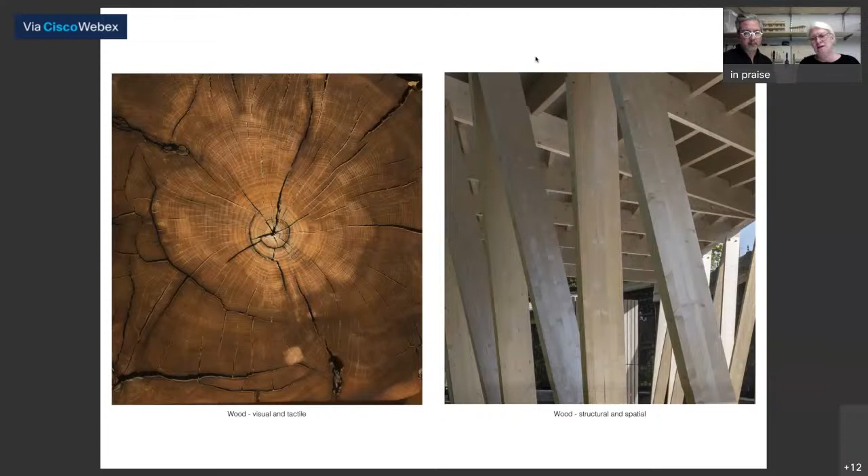As you mentioned, Daniel, we took the name of our office from the book In Praise of Shadows by Tanizaki, a book that we used and introduced to our students when we were teaching at KTH. It's written in the 30s in Japan as a reflection on the qualities of traditional Japanese culture, when modernity and modernism come to Japan as it opens up.

In relationship to architecture, there are some nice sequences, notions and descriptions of the light through a paper wall, or the sound of your steps when you walk on the gravel in the garden, the special relationship between inside and out, the door spaces, all the qualities in Japanese architecture. So we took the name as a kind of reminder for us in our practice, these tactile and sensual experiences, this kind of architecture as a very physical experience. It's one focus for us.

The publication we did with Daniel in 2018, in relationship to the exhibition in Venice, was a summary of the exhibition projects until then. For us, these smaller projects and exhibition projects are kind of research projects, experiences we use for larger projects, and we try to give ourselves a new area to study or a challenge when these kind of smaller projects appear. So the book is a story on that work and led up to the Pavilion in 2018, and that's a process that goes on.

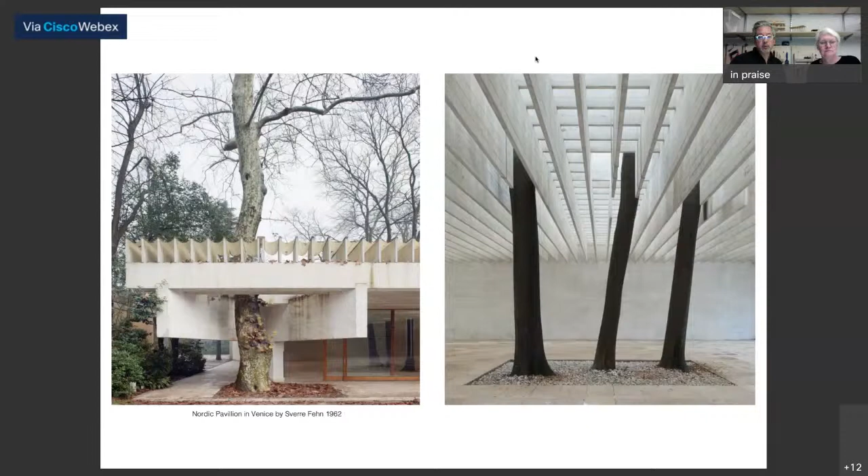This became a role model for how we've approached projects afterwards as well, because when starting with the white paper or empty space and having these tasks, we started with the drawing as a tool, investigating the geometry of the pavilion itself, seeing what we can learn from the structure, and how we could generate new shapes and expressions out of it.

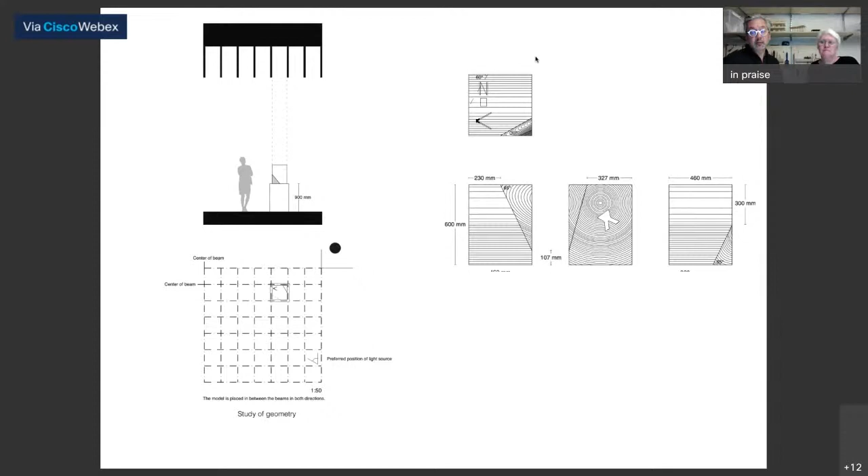So the footprint of our Elm installation is the same as the open space between these two layers of beam structure. We also worked with cutting angles in this object that relate to the sun angle in Venice, and treated the areas in different manners, also exploring the possibilities of this massive fresh wood collected from Royal Park in central Stockholm. The elm trees are taken down to stop the spreading of Dutch elm disease. So it was also a comment on wood, the trees in the Nordic Pavilion, and a geometric study.

It was then very strict in its original shape. We have it now in our office, and over the years it has, of course, deformed as these kind of really thick, massive wood pieces do.

Fredric, can you talk a bit louder?

Okay, I will. Just a few years later, we were asked if we were interested in working with the design of an Aesop store in Stockholm. Aesop is a global skincare brand based in Australia, and they were to open their first store in Scandinavia, in Stockholm. Their concept is to work with local architects to get a unique design for each store, and all these unique designs are their main strategy.

We thought we could learn something from the way we worked with the Venice installation, so we continued the collaboration with Lismary Hoffman, carpenter, designer, artist, who worked with how to handle these big, massive elm trees, and proposed to Aesop to form the three main events in the store: the sales situation, the demonstration sink, and a relax area, in fresh, massive elm tree.

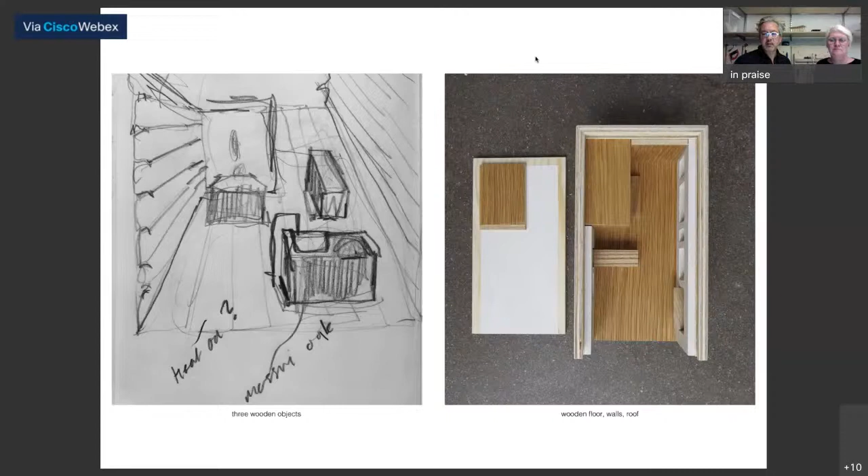We also thought, since the Aesop clients were interested in the In Praise of Shadows book and knew that book, we took the opportunity to relate a bit to the Japanese tradition of creating a sequence of spaces. So although a really small space, we worked deliberately with the outdoor view, what you experience outside. First, you enter one space with the sink, the demonstration sink and the counter, then there's a backspace clad in wood, also on walls and in the floor, and a small seating and relax area.

These are some pictures that you can see in the back, the all-wood environment. You sit on a piece of elm tree with a leather cushion, a soft back, and you see the central piece done from a piece of elm tree over 100 years old that we found south of Stockholm. It has deformed over time, but it gets more beautiful over the years. It was very fresh when it came, actually, even after drying for a couple of months and being worked outdoor, ants kept crawling out of the wood during the first months after installation.

A few years later, we were asked to design a second space in Stockholm. The first one was in a more posh inner city situation. The second, on Södermalm, a different part of the city with a different, more laid-back attitude. Their ambition was to make a more relaxed situation, to create a Swedish living room.

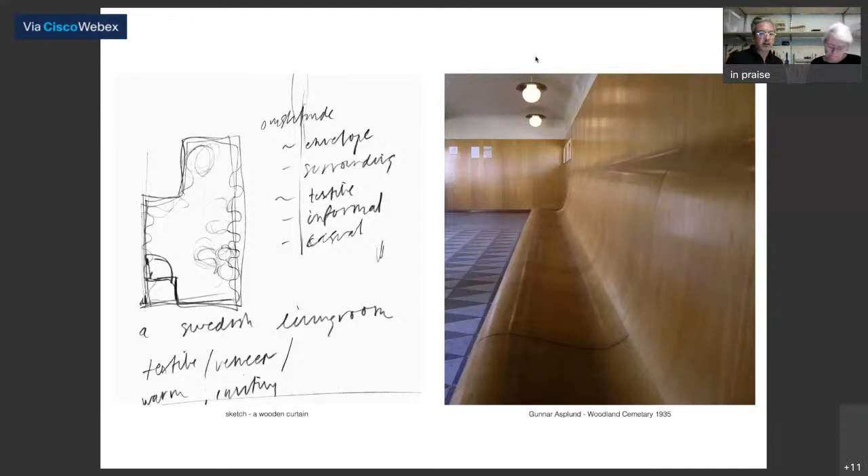We developed the concept of a draped space, working with the veneered wood as a curtain wrapping. It's really small, only a 25 square meter space, to create this second store.

Eventually we investigated different veneers and ended up with alder veneer. There's a nice warm tone to it without too much pattern, and it's also quite close to the teak wood on the facade of this building at the entrance floor.

Also in the entrance areas to the house, you see it on the left of the picture - it's a warm wood. We also took details from the entrance door, these rounded corners at the glass, to connect this interior to the building itself.

The floor is the existing concrete floor that we polished. The roof has a quite intense pink color, although you don't see it too much, not too much contact to it.

When investigating how this could be produced today, we ended up with the Italian carpentry, Solosomisura, outside Milan. They came here, measured the space, and we developed how to build this together with them.

They built it in sections, where they put the veneer on these sections correctly, so there was no molding involved - they could form the veneer on top of these modules.

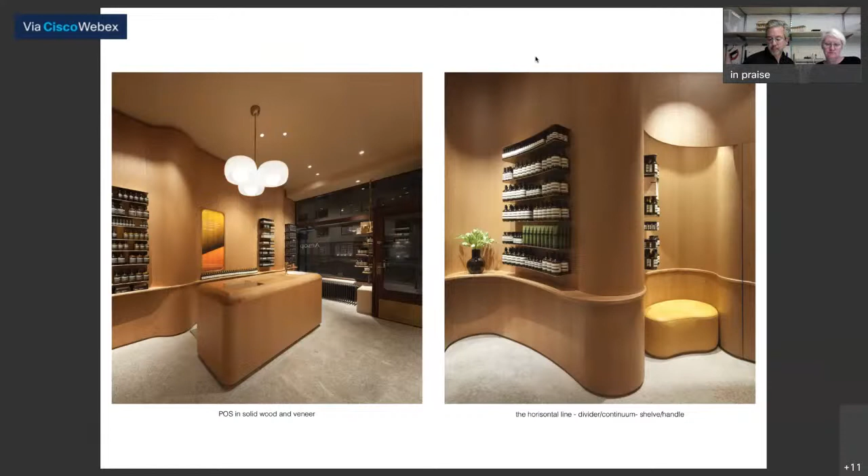As a continuing investigation in different wood, we got a question from Wallpaper if we could make a pavilion for the exhibition Handmade at Salone del Mobile in Milan. We got the assignment to work with Dinesen, a high quality wood floor maker, an Austrian cabinet maker, and do something together using wood planks, floor planks, but in a new way.

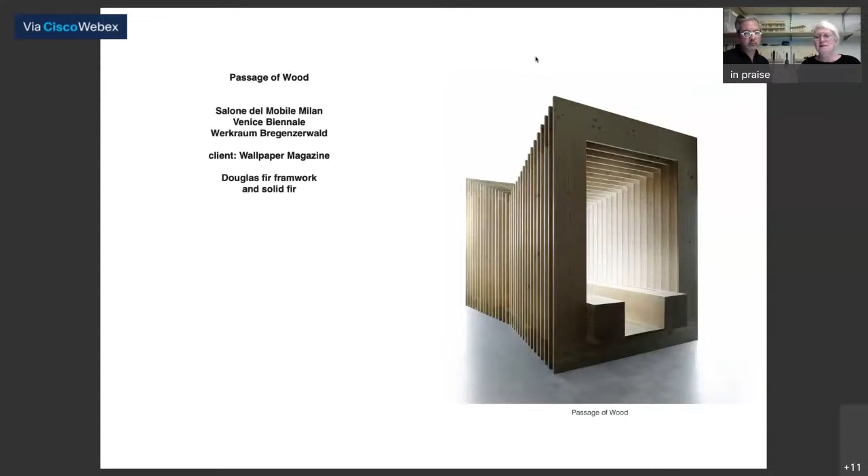So we used these different dimensions of the wood planks, both in plan and section, and put in two very heavy original tree trunks from this Dinesen Douglas fir from Austria, and made this pavilion.

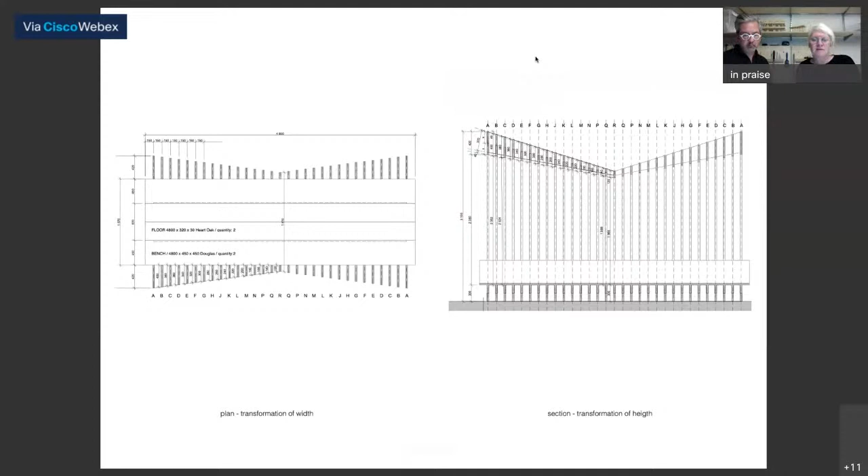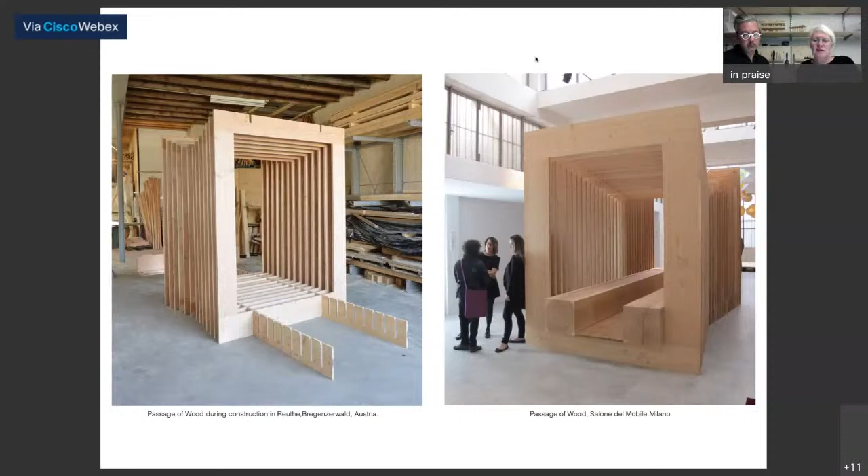This was made so we could easily take it apart and exhibit it at the Venice Biennale in a 14th century palace. It was so heavy that we had to take away these big tree benches that were in the original pavilion, and made this oak floor instead in Palazzo Bembo, just facing the Grand Canal.

After it had been exhibited there and also in Austria, they just wanted to send it to become firewood. So we thought we'd take the structure back home. It was possible to mount it as a flat package, like an IKEA package almost, and used it in the Swedish archipelago, making a kayak house for kayaks or teenagers sleeping over.

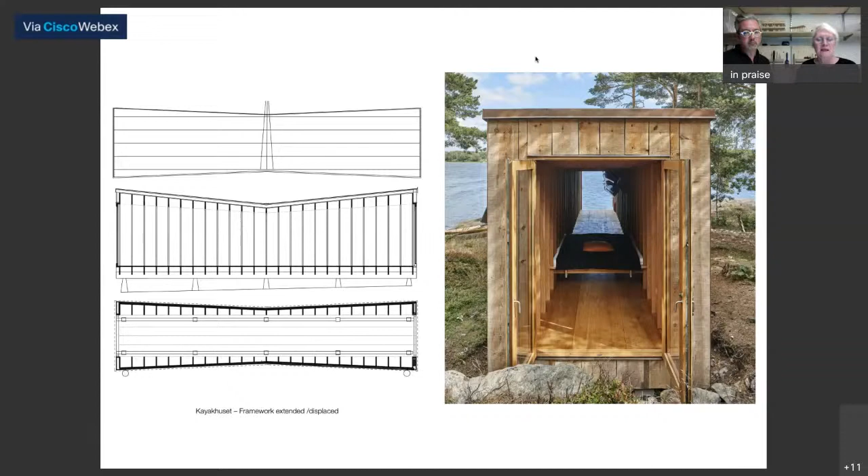The frames were mounted on 10 concrete pillars in the sort of blueberry ground. We tried to do it very carefully, not destroying the area around.

To contrast from the very fine interior frames, we took down 8 pine trees on the site. We had a carpenter cut this with a chainsaw and get some very nice facade planks, dried them for one summer, and then puzzled it together as a facade.

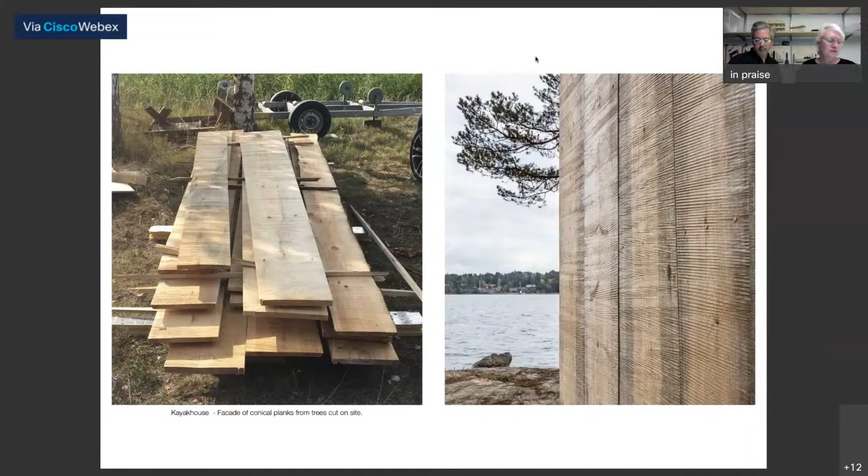So we thought we'd continue the tradition that Dinesen had, taking down one tree at a time in the woods of Schwarzwald - and now we did the same here in the Swedish archipelago. This house is seen from above, so we also took care to make a very nice copper roof.

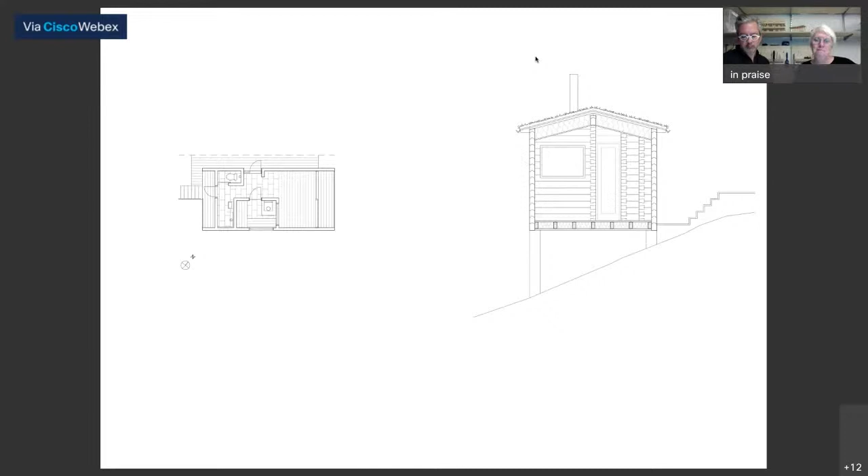And this is also, of course, a continuing transformation of the tradition of log houses. We wanted these joints to be seen both on the inside and the outside, and the plan was thought about how we could get these walls and joints in a logical way.

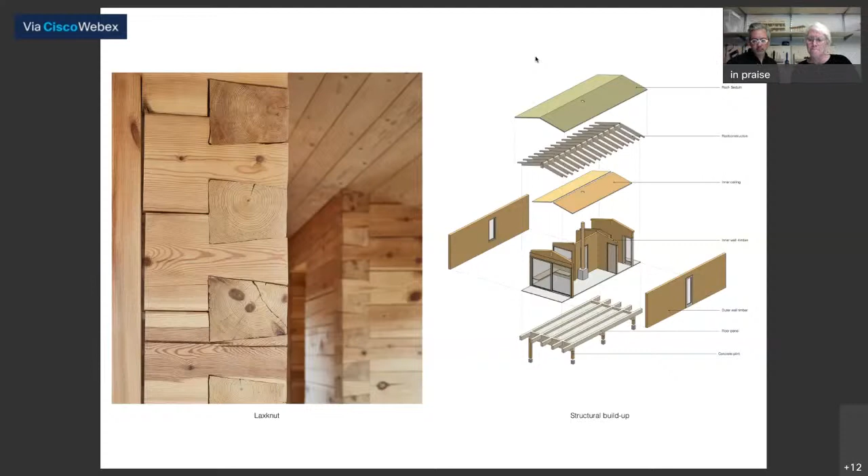So it's like a box inside with the sauna, and we worked on that you could see through the house - small house, but you can see through it. Here you see it stands on quite high concrete plinths that also go 2 meters down in the slope.

Then for the Venice Biennale in '18, we were invited - it was a collaboration by Sweden, Swedish Wood, the Association of the Swedish Wood Industry, Folkhem, a client of ours, a housing developer, and the Swedish Institute made a joint venture in the Serra dei Giardini, the garden outside the Biennale Giardini, as a collateral event to the '18. The theme for this exhibition, where other architects participated with installations,

was for architects to work together with companies within the building industry to develop architecture in relationship to their digital production techniques. So our task was to create an outdoor pavilion to function as a meeting space for seminars, as a stage for larger events, and also as an area to be used by the cafe when there were no events going on.

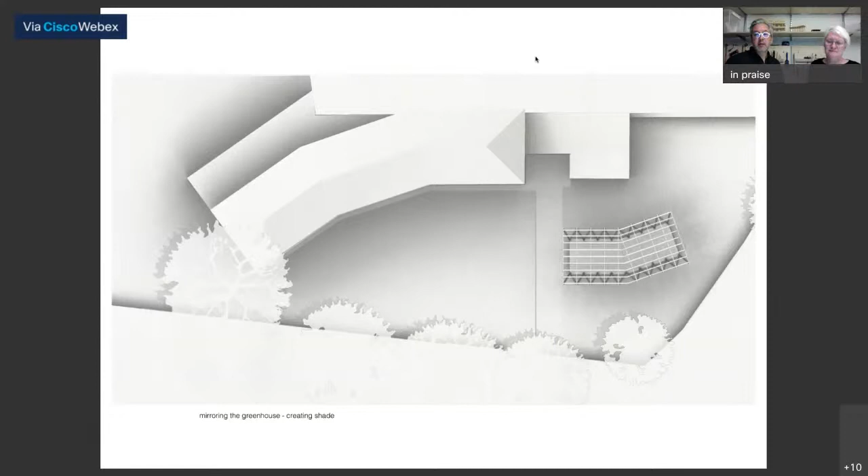Our task was to create shadow protection from sun and rain, so it was later called Loggia d'Ombra, which means shadow pavilion. We mirrored the geometry of the greenhouse to create a shaded place between the pavilion and the cafe area, so you have shadow on the ground as well as inside.

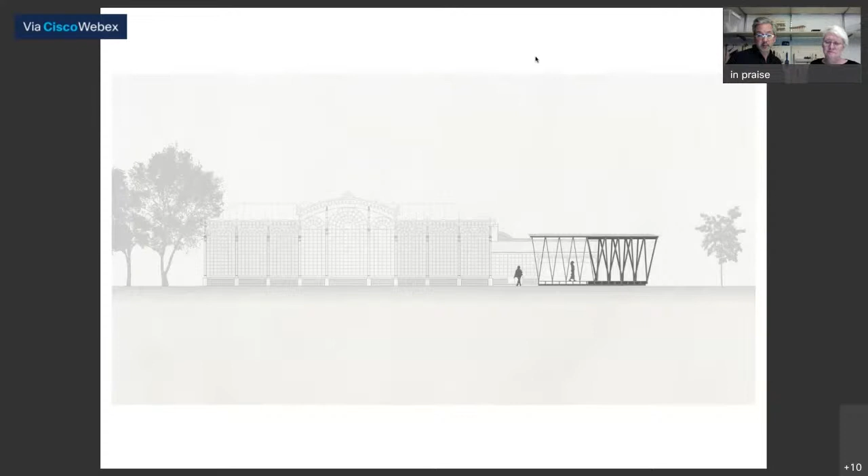We developed this diagonal structural system to have a clear structural expression just as the greenhouse has, and a height that is just under the greenhouse, to respect sight lines and perspectives on site. The authorities had some thinking about that. We worked, as we do, in digital models and physical models, studying the structure

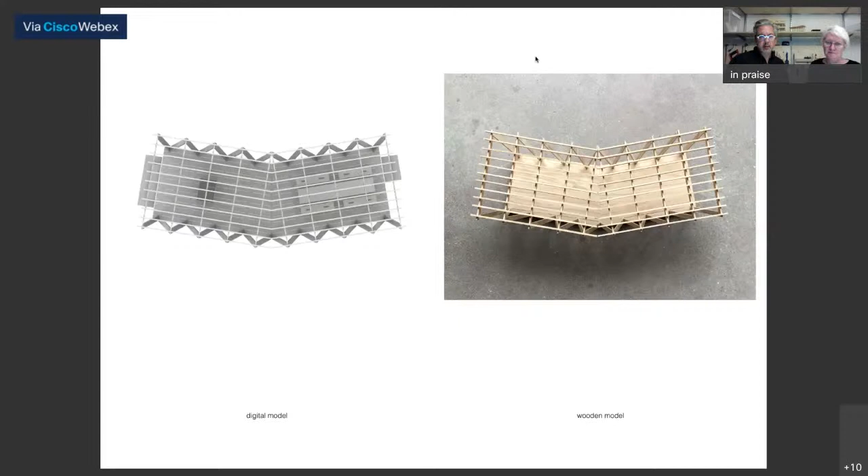for going into production. Then we had to find a way, with Martinsons, who's a glulam and CLT producer in Sweden, to build this as a structural system possible to assemble easily on site, but also to be possible to disassemble for use at different other places after the exhibition.

Most of the members are all glulam, 56 by 225, and most of them are also just cut, or with a diagonal cut. We focused more complex geometry on the diagonals, the vertical diagonals, and these joints that we wanted to be tight with a clear position for the fittings. They have visible screw heads, to show that it is a dismantlable structure.

Oops. I'll change the picture for some.

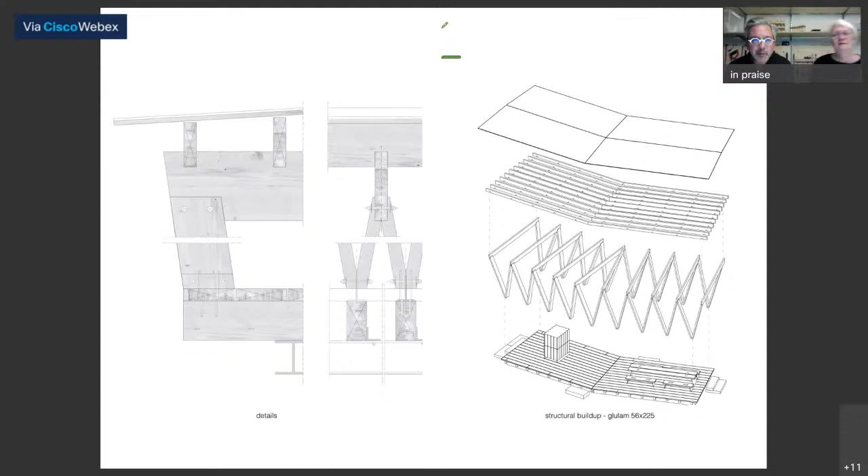Daniel, having some kind of commenting. I'll get rid of this. So, thank you.

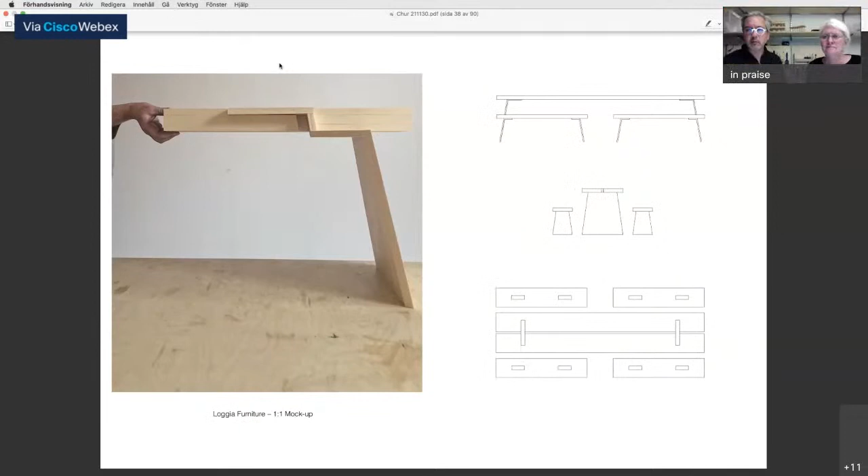Probably you can have the computer a bit closer. It's always very slow, and then the computer starts to fade the sound a bit off. Okay, it's at the limits. Let's put it that way. Okay, we will bring it closer. Maybe you get better sound.

That's probably better, yes. And to get a structural idea also better furniture: you see the horizontal seating part, which is made of wood, is carried by the leg structure and locked geometry. So when they are paired, you get a self-locking stable connection.

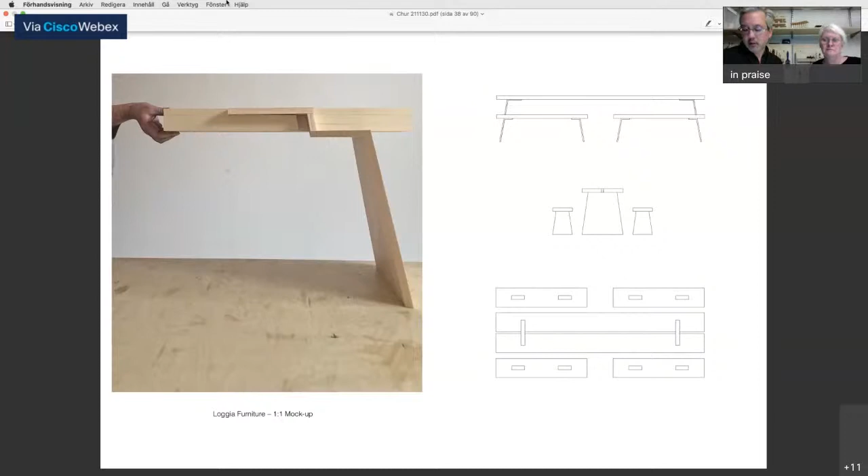And the legs were made in cast iron. Here we see the wooden plugs that we built, and then they were sandblasted to get a more visible imprint of the wooden structure in the cast iron. So these are the prototypes it's made.

And also the cast iron was for us interesting to investigate also in relationship to the greenhouse next to the pavilion.

We also developed this cabinet that was a space to put in LED screens that could be used for seminars and for presentations. So this is the short end that worked as a stage for the event on the grass area.

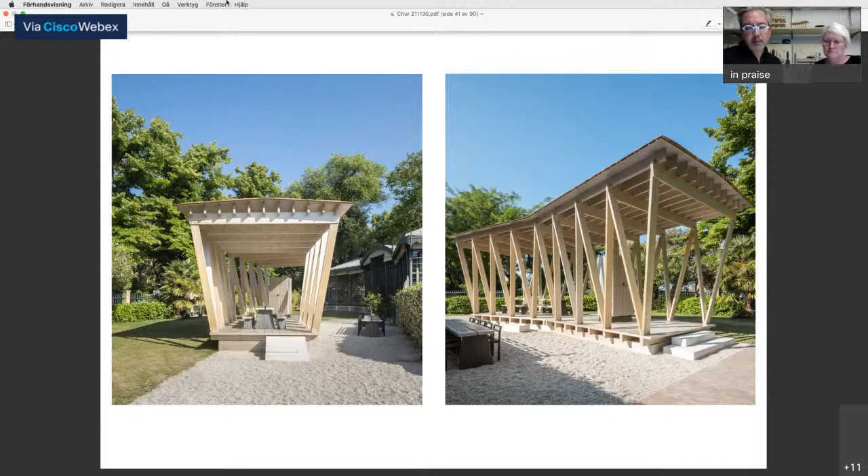And some overall views of the finished pavilion, the seating area, and this raised floor, creating also a seating situation at the periphery of the pavilion. So also the edge of the pavilion becomes like a seating situation where you can sit underneath the roof, and then you can also be inside the pavilion.

It has a slight silver tint paint, semi-transparent silver paint to the wooden structure, to avoid this yellowing effect of wood over time, and also to create a little bit more of a reflection of the light during the day, and also as a comment to the metal of the greenhouse structure.

The furniture was also stained in silver, and you can see the cast iron legs are black.

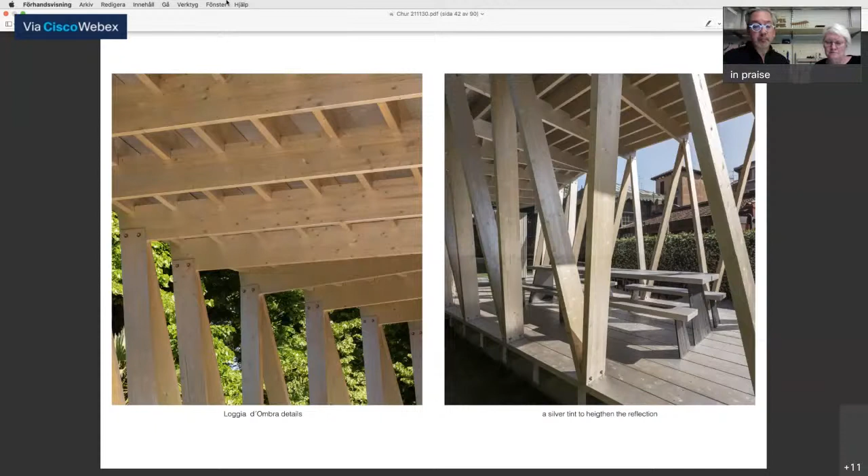Parallel to the development of the Venice one, we developed a sister pavilion for the Stockholm situation, where it worked as a pavilion for dialogue in relationship to a regulation plan and development project. That was placed in a Stockholm suburb for a couple of years.

But it has now been transferred to a public park at Djurgården in Stockholm, where it will be opened up to the public in the spring.

The original Venice structure, after Venice, traveled on to the Swedish residence in Nairobi. So both of these pavilions have got a new permanent home.

The furniture in the production version, produced by Källemo, and the steel fittings for the detailing had to be a bit stronger in the Stockholm context. We had to dimension that for snow loads, and also the added walls bring wind pressure onto the structure. So it had to be a bit up-dimensioned in the fittings.

Before it was decided that the Venice Pavilion would travel on to Nairobi, the Swedish Institute in Paris showed interest in the pavilion. They would like to have it for the garden, and it didn't happen, and then there was a pandemic, or still is, but even more so last year.

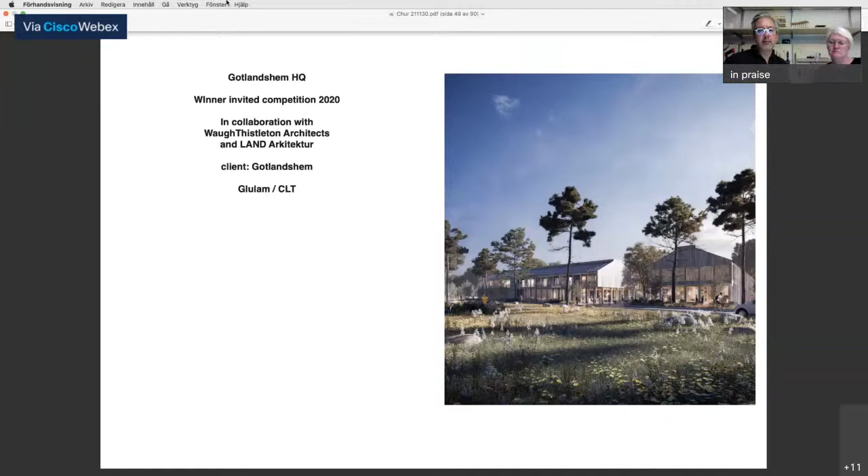On the theme of Glulam and CLT, we took part in a invited competition that we won last year in collaboration with Waugh Thistleton Architects, a British architect office based in London focusing also very much on wood in all the projects, and a landscape architect. The client here was Gotlandshem, the public housing company at Gotland, a Swedish island in the Baltic.

The task was to create their new headquarters with office spaces, also evacuation flats, storage, garage, workshop, and also spaces to be able to rent out.

Here we departed in the local tradition, the silhouettes of the houses in the inner city, but also these closed courtyards of the agricultural farmhouses in the countryside, and the quality they have to give a protected outdoor space, protected from wind. It's an island where it always blows, but it's also a very sunny climate, so really nice microclimates are often created in these protected courtyards.

The main theme was for the buildings to form this outdoor space that became the social hub and meeting point of the whole space, for the people working there but also for all the visitors during the day.

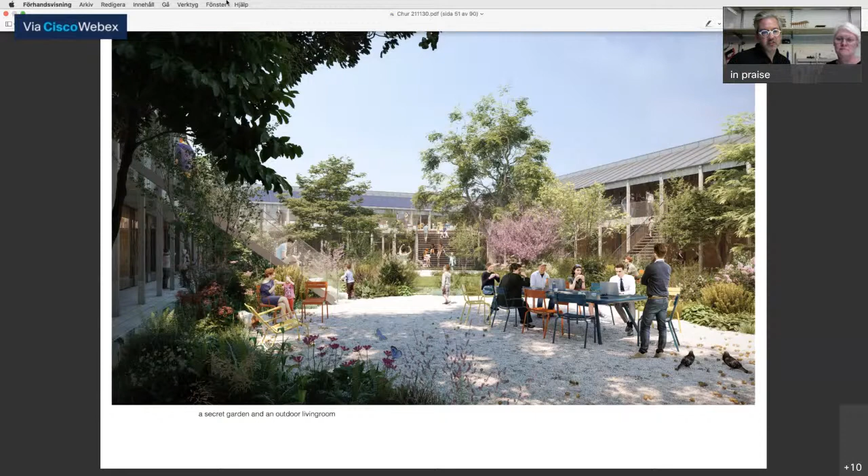So the center is kind of a secret garden with a small botanic garden. It's protected, with a very good climate that also allows for some exotic plants to survive on the island, in contrast to other situations.

In the plan we worked very much to find it's a glulam pillar structure with CLT slabs on the first floor, and to have a structure that works all over the space to create these large span spaces for garage and workshops, and also exhibition areas and entrance areas in the bottom floor, and in the right building possible shops or office spaces for external uses.

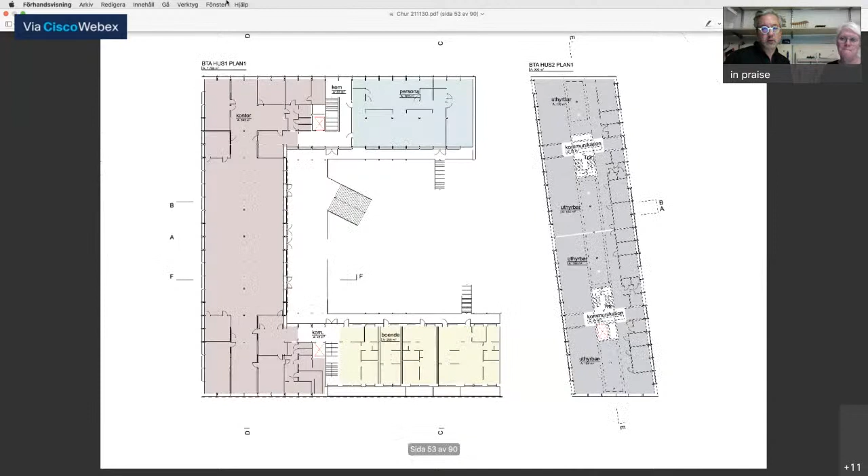On the upper floor, the housing flats are shown, the yellow and pink is the office space, light blue is a space for personal showers and also lunch, and to the right again, external use.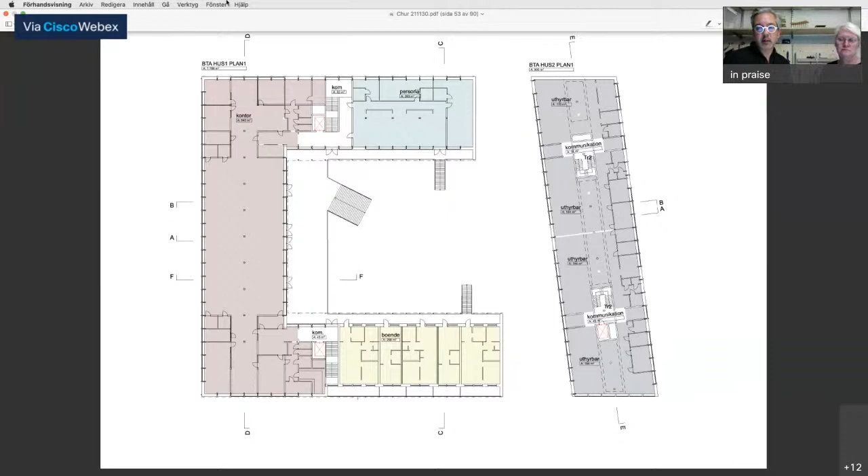The structure was developed with glulam and CLT structures to create the large spans at the bottom floor, with a clear modularity, also to allow for the project to be developed together with the client after the competition, but also to be able to rebuild in the future, new holes in the slabs or shifting glass from solid if needed.

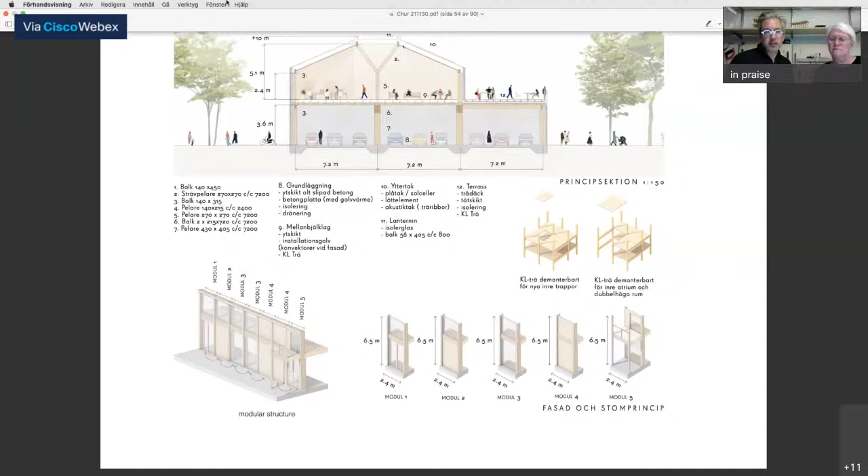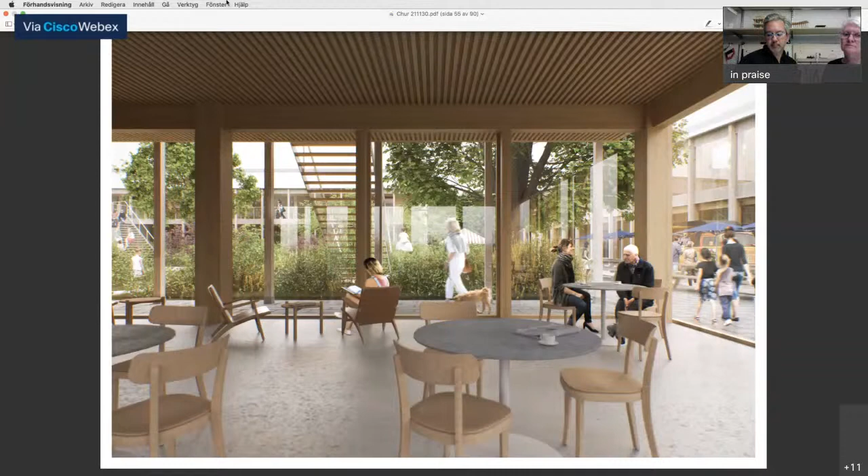The upper pillar splits up. First, the cafe area, the entrance situation with good connection to the outdoor space in the courtyard, with a floor of polished concrete or local stone. On the upper floor, the office space has a Y pillar that creates a situation for a light lantern, to get daylight into the center of this open office situation.

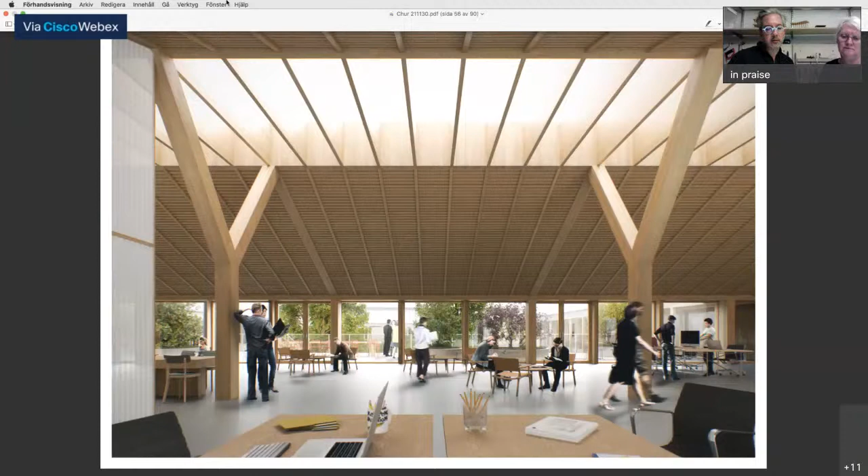Now we will show a small CLT house atelier, an extension to a 3-generation summer house place in the Stockholm archipelago. You can also see in the picture the Kerouac house that I showed earlier.

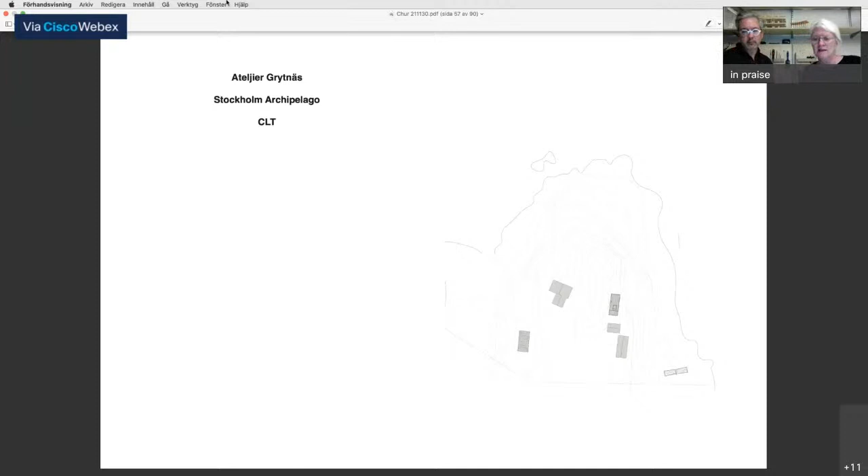When working with CLT, you have to be as economical as when working with these pavilions. You want to avoid paying for the cutouts in the CLT boards. So in this house, there's one opening on each side, and this north facade is a big window, so there is not so much CLT board used.

It's also a very compact house, 40 square meters, with 3 small sleeping cabins. Each space has a possibility to see through the whole volume, or when you get to the entrance you can also see through the house towards the water on the other side.

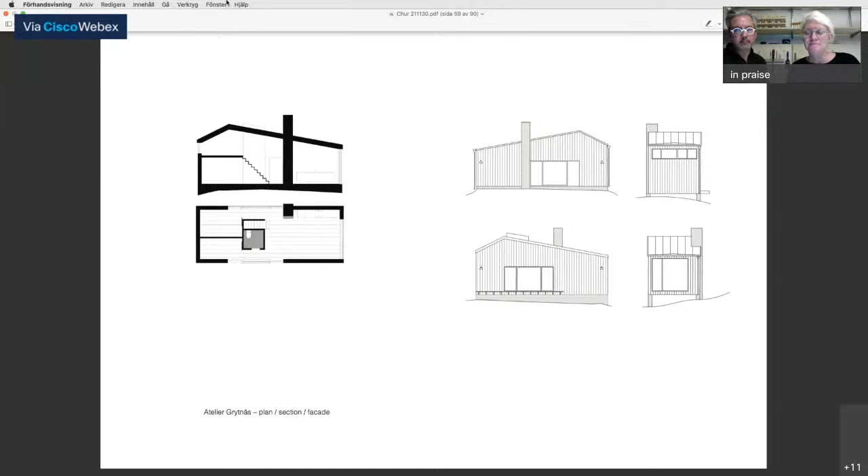Working with these CLT dimensions from this factory, you could have 4-meter long CLT boards that then took the load bearing from wall to wall. And then there was a central piece that was stabilizing the whole structure, and the chimney that also was stabilizing.

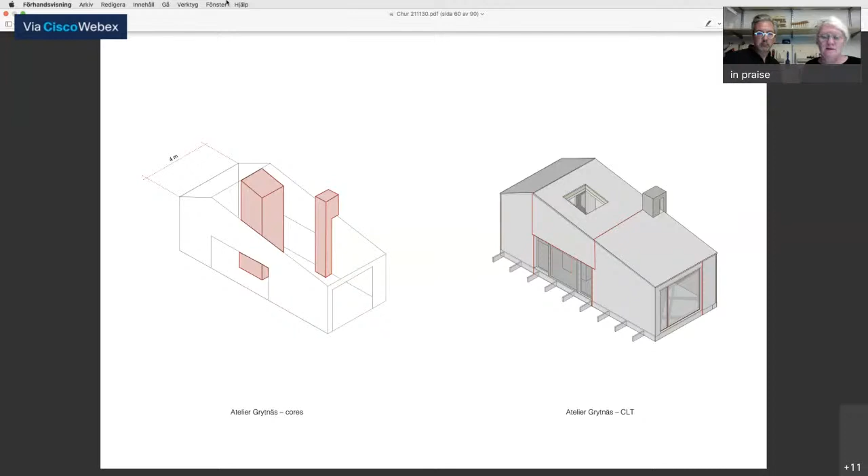You can see on the CLT boards also that the divisions are made so that one board, on the facade for example, leans on the other two sideboards, so you don't need to have any other glulam slabs or something like that.

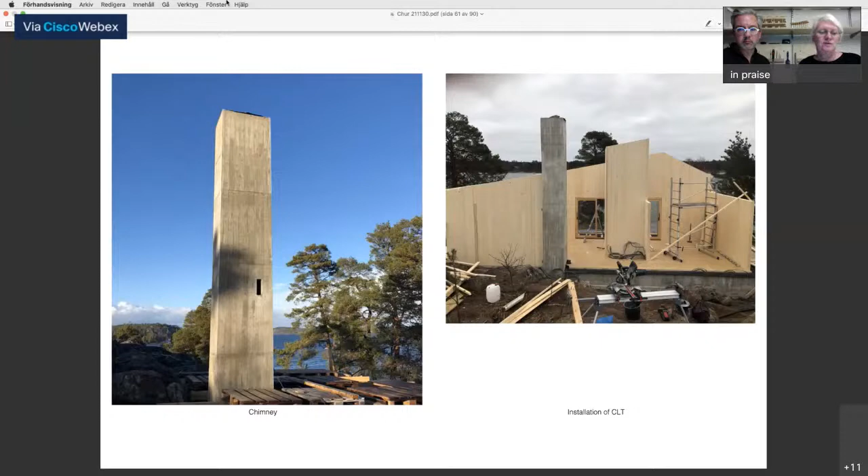Here the whole house stands on two long concrete slabs without blasting any rock, being very concerned with the existing rock, not to destroy too much. And we reused the form panels for the foundation slabs to make the form for the chimney.

There was also some planning in how to get these boards up to the building site. This was 20 meters from the road, so the crane had to take them in a certain order to get the windows in the right space.

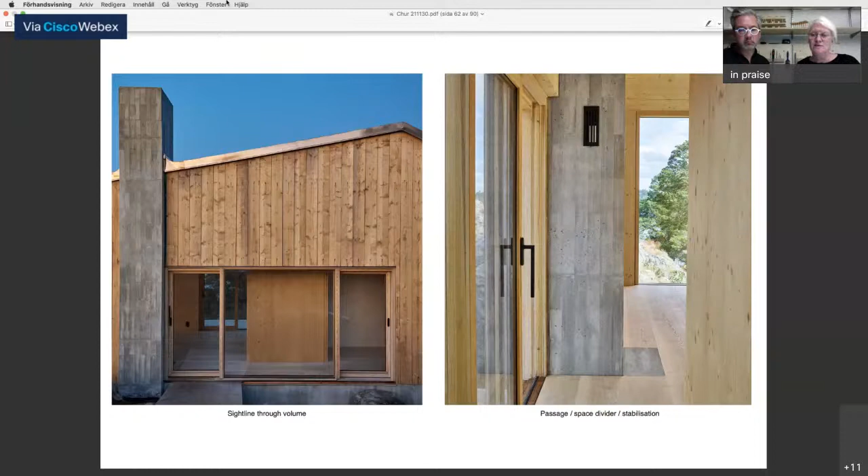It's very compact, and you see the chimney also works as some sort of space divider, but still you can see from one part of the house through the length of the house.

Here you see one of these long foundation slabs, just connecting to the rock without blasting the rock. That is important for us, to be careful with the ground.

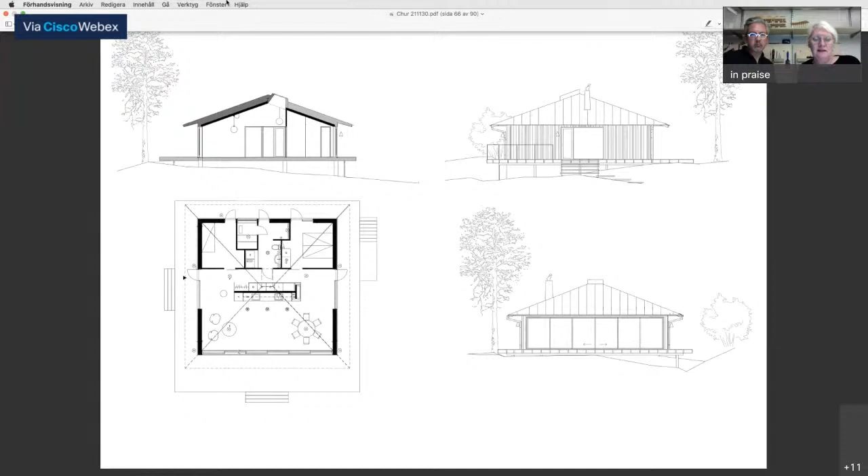And the central piece of the kitchen and storage piece that stands free, and a light from above that lets the light come in behind that centerpiece.

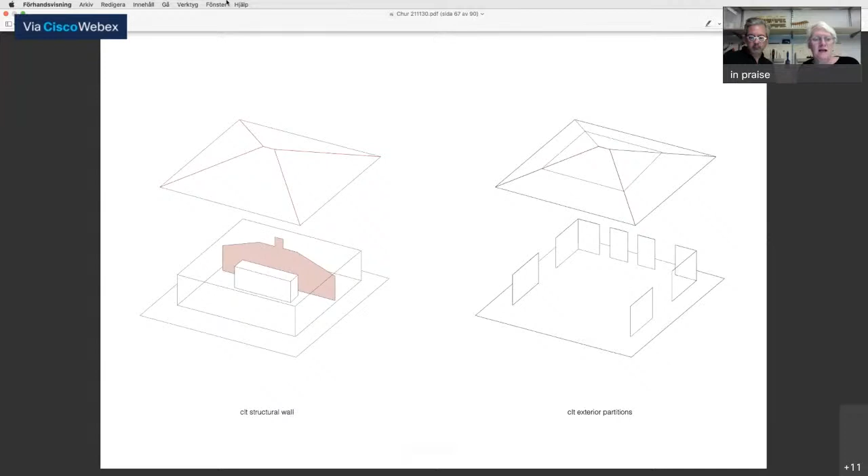Here it was also some planning of saving material. So the CLT boards are the walls, of course, and all the sliding doors and windows are their own piece from floor to wall, so you don't have to pay for this part you cut out. And also a long wall that has stabilized the structure, and the roof divided in parts that then lean on this wall and the lantern.

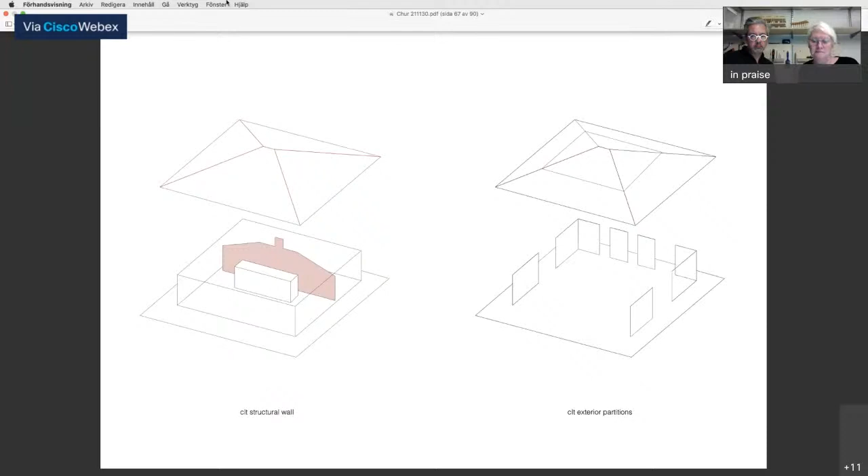Here's a fun bit of the process for every architect to see the structure being mounted.

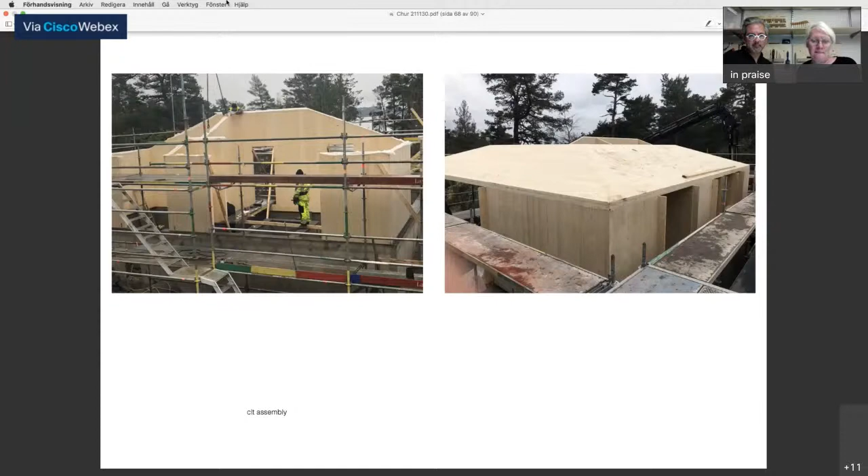And here the challenge was, of course, to not have pillars above this kitchen and let the roof sort of float above that. So the back wall there is taking the load.

It's careful and respectful to the nature.

And with the CLT, you have to think about how you make the installations. In this case, in some places we could have all the electricity behind the outer walls, but then if you have a wall that's seen on two sides, you sometimes have to choose not to cut it into the walls. So we let some of the electricity lining be seen, and this corridor gets this overhead lantern light down, and sliding doors also of CLT boards, so you don't have to have doors standing out in the way. Also a compact house.

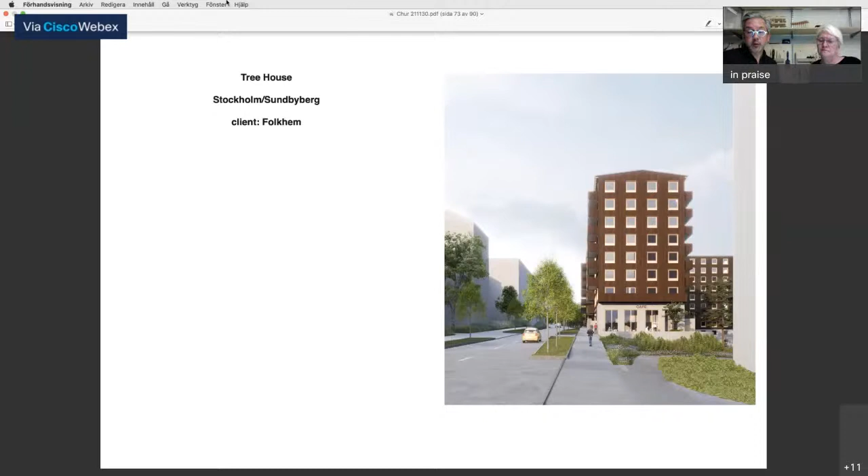Here it's in the context of densification of an existing suburb with a metro station from the 70s, where you see the colored houses are all the new housing projects, and our ones are the brown and the gray one. The volumes were given in the vision plan, and our ambition was to work with this volume to connect them to the neighboring three houses and see also what we could give to the context and to the surroundings.

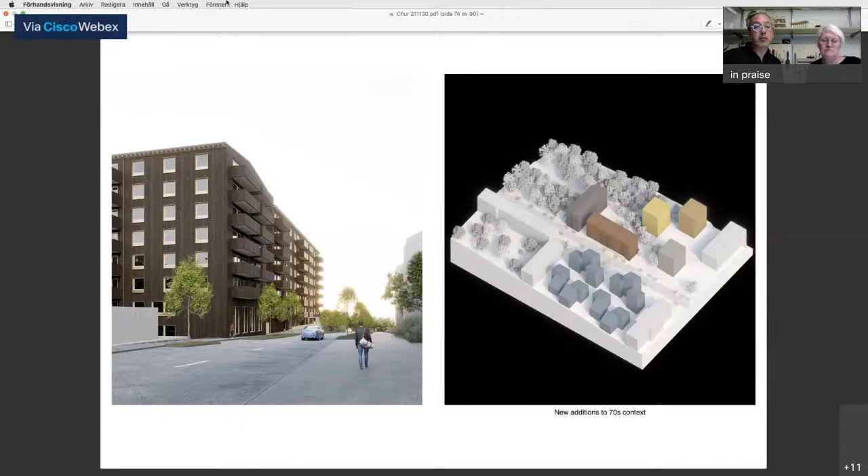The detailing with a clear wooden character at the facade and balconies, and the detail between the facade and the floor plan.

We tried to keep it as simple as possible, with a wide spread of sizes on the flats from 1-room apartments to 5-room with kitchen, 4 bedrooms plus kitchen, and they are all oriented in relationship to light and to sound, noise from the street in the south, views to the north.

And in housing construction, Sweden has to relate a lot to daylight qualities, accessibility demands, and of course the economics of building, so to create really good floor layouts in not too large a space, and also to be able to build this in wood, finding a clear structural logic to make it advantageous for stability and CLT structure.

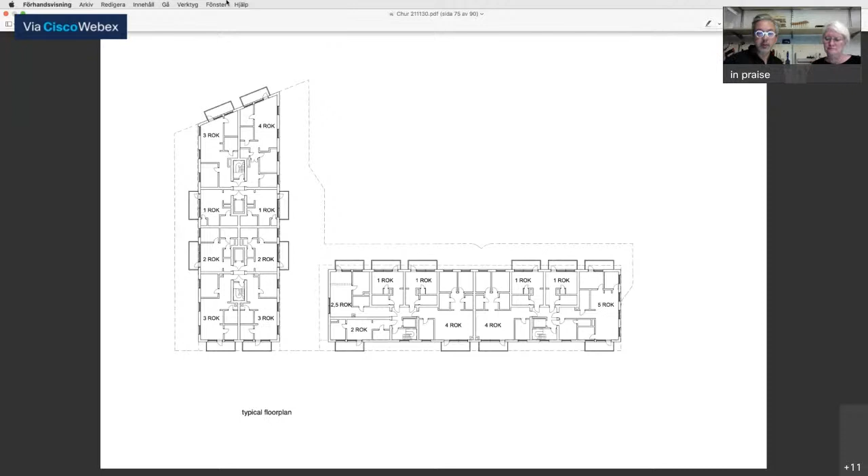And to give back what you can to the city, there is a semi-public space, a commercial space at the short end. Both of the two volumes, one could be more public, and it becomes a semi-public piazza close to the street.

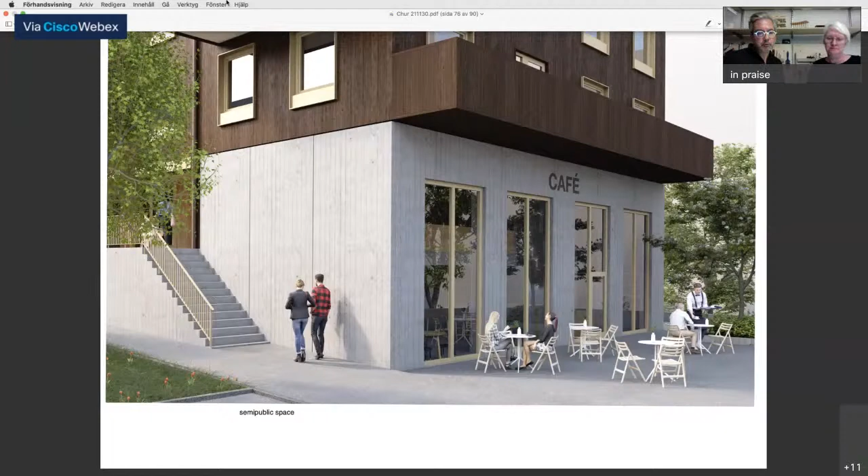As this is also a situation where we will have 2 stories in concrete, we have worked a lot with the hierarchy between the concrete and the wooden construction to maximize the use of wood, but also to have a clear display of the different cores. So the concrete core has a concrete facade, and the wooden structure has a wooden facade.

And the wood panel is thermo wood. It's a product that is preheated for longer durability, and it has also fire protection treatment to be able to build its height without the use of sprinklers in the building.

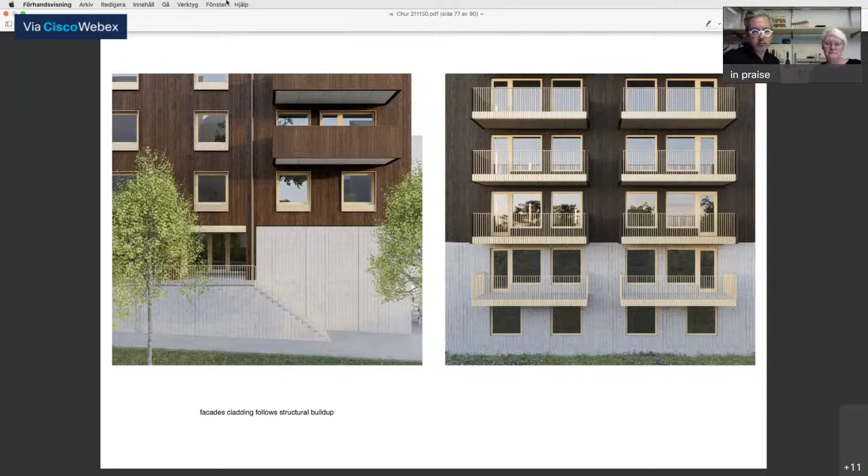The balconies are also a bit diversified due to location in the house. The ones towards the street are solid for protection from noise, and the ones facing the courtyard are open to provide more light and views.

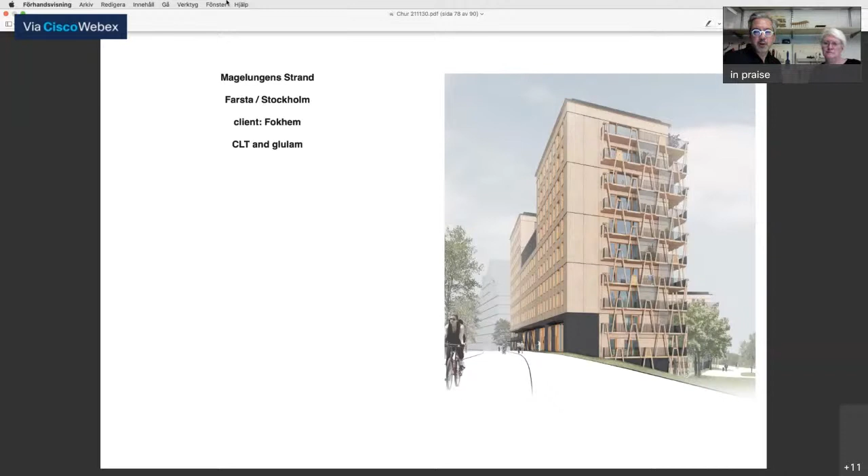Another project with client Fokhem is in the southern part of Stockholm, Farsta. It's also a CLT and glulam situation. Here there's a long road connecting two areas, Farsta and Fagersjö, and the ambition from the city was to urbanize this street stretch. So the facade towards the street has a clear division of the entrance floor, but we also decided to split the volume into two tower-like parts connected by a lower part, rather than one long building.

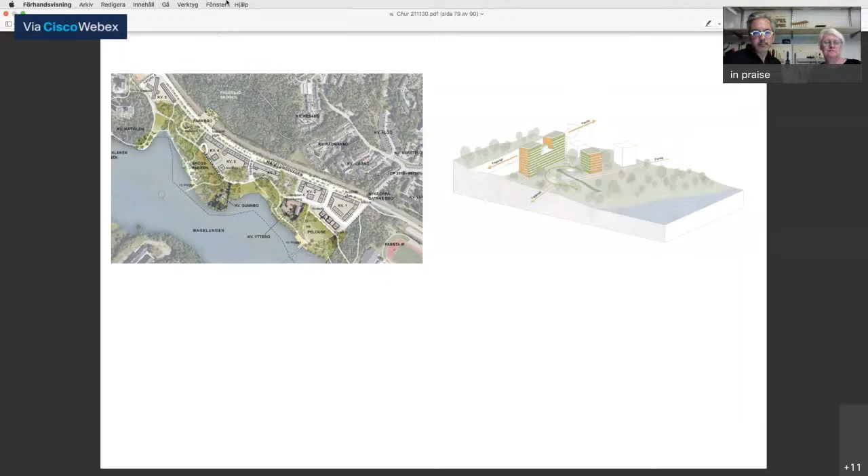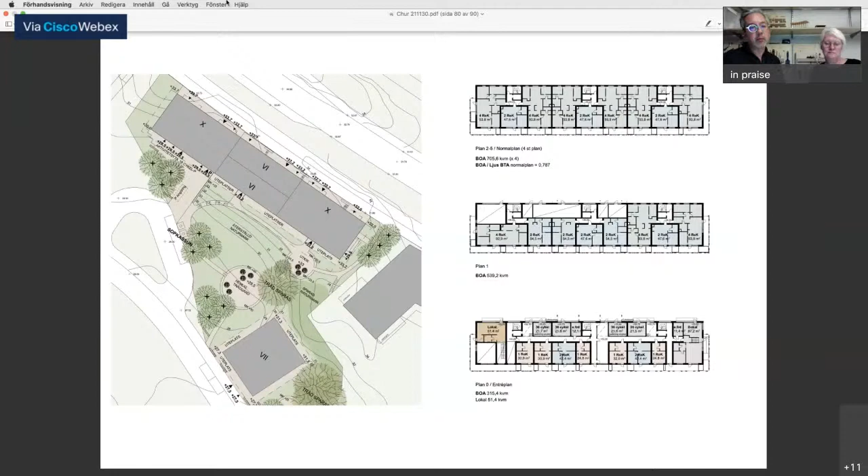The footprint of the courtyard is very small, but we have a lot of land around the building. There was also a demand to keep the natural qualities the land has today, even though it has to be rebuilt. So there are some circular areas for barbecue or playground situations. The land slopes towards the sea, creating a souterrain situation, so we can work with double-height entrance areas in both directions.

The street facade is more strict. You see the darker color for the entrance floors creating this classical division, and also a greenhouse for common use integrated between the higher volumes, which also has a roof terrace towards the water.

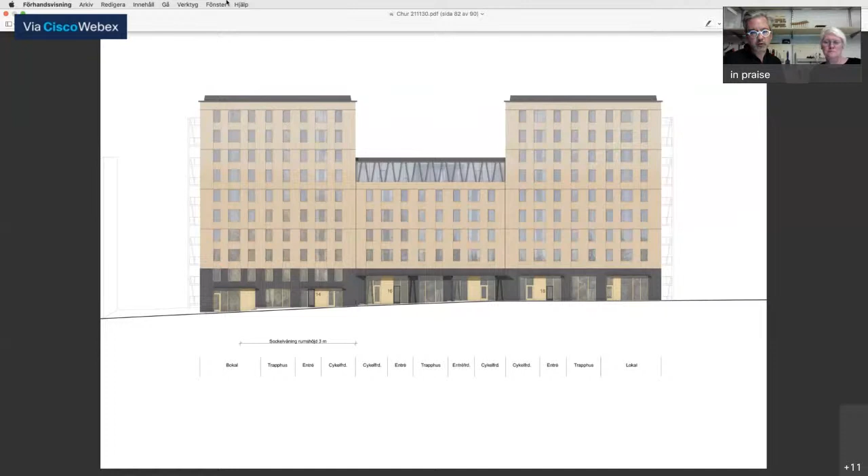Towards the landscape it's a totally different, bigger scale. It's almost like a knitted glulam structure that creates the balcony zones, seeming more like a scaleless structure bringing the whole volume together as one. There can be glazed partitions for glazed spaces integrated.

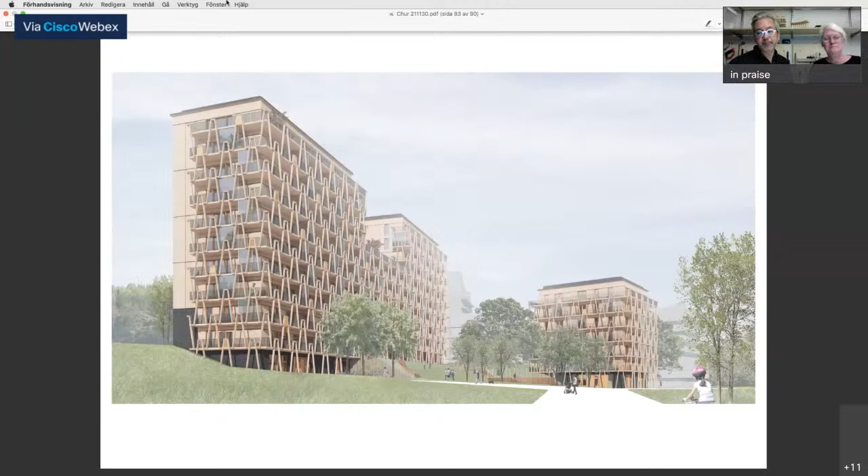But the structure also gives a spatial order, so that when inside the space you also see the balcony space. That becomes like a part of your home.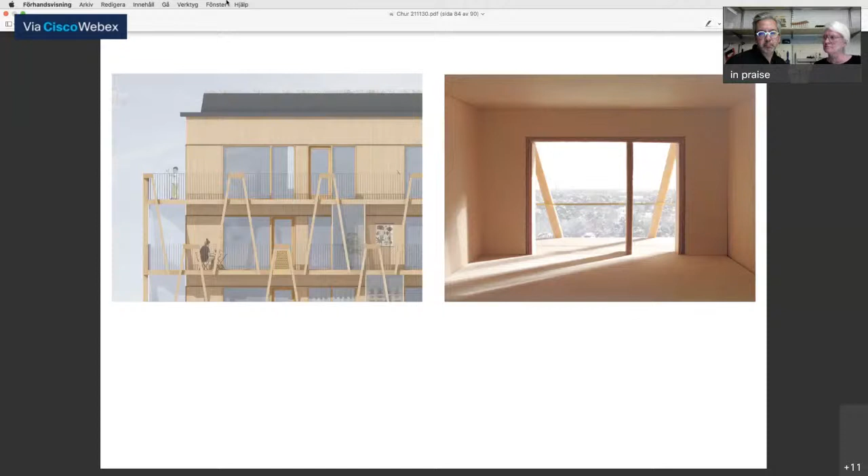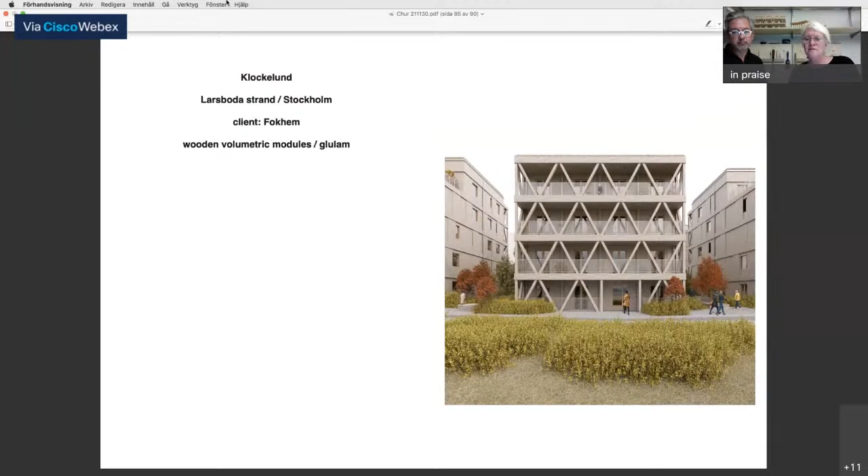And here is the last project we will show you. It has been in process for quite a while and will be built next year. It's five volumes, also on a slope towards a lake, and we have been lucky this time too to get this lake situation. It used to be sort of a garden atmosphere with small growing houses, so that's why we wanted these balconies towards the lake and the inner courtyard to be quite big. In the back we have a long strip of higher dwellings that will protect us from the sound of the highway.

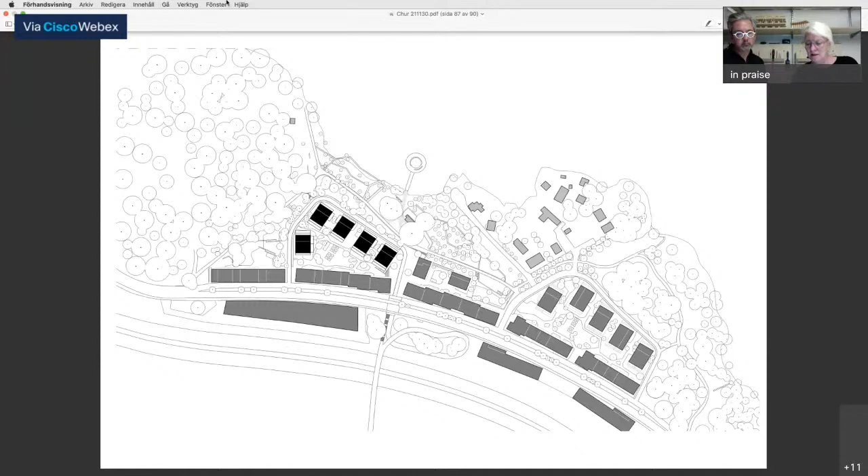This is planned as one bigger apartment towards the lake and two smaller ones towards the courtyard, but all have big balconies, and the top floor has a terrace towards the lake.

Our ambition here is to have sliding window doors to be able to close the sides since the volumes are quite close together, with a mixture of either a wooden volume building system or CLT - we don't know yet - and this glulam balcony system. That's why we've been investigating these pavilions and how this can become a good structure in this Nordic climate, also inspired by what we've seen in Switzerland and Austria on these good trips we plan to continue in the future.

So maybe this will be built by the next time we see you in Chur. We hope.

That was what we had today, and if there are any questions, we are happy to answer.

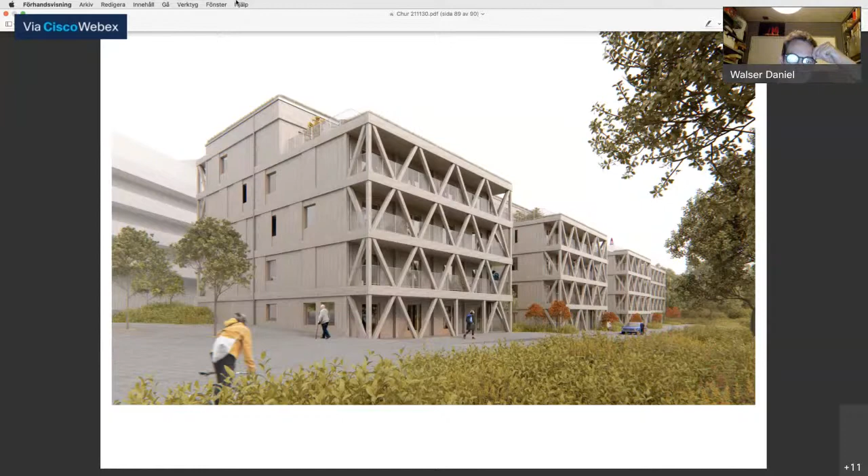I want to thank you very much for your time, and that it was possible that you prepared the lecture. For me, it's always interesting to exchange with you and to develop together with these projects, with this thinking. I really enjoyed this talk on where the value of architecture lies. We shouldn't underestimate this power, what we can create. That's a bit why I'm doing this lecture series now.

The next lecture will be on the 14th of December, with Antonio De Rossi, an architect from Turin, who will talk about Alpine architecture, but from an Italian perspective. I'm really looking forward to that, because it's always interesting to think about what we can do with our tools as an architect. It's much more than just filling volumes, we bring life to spaces and to towns, and that's interesting.